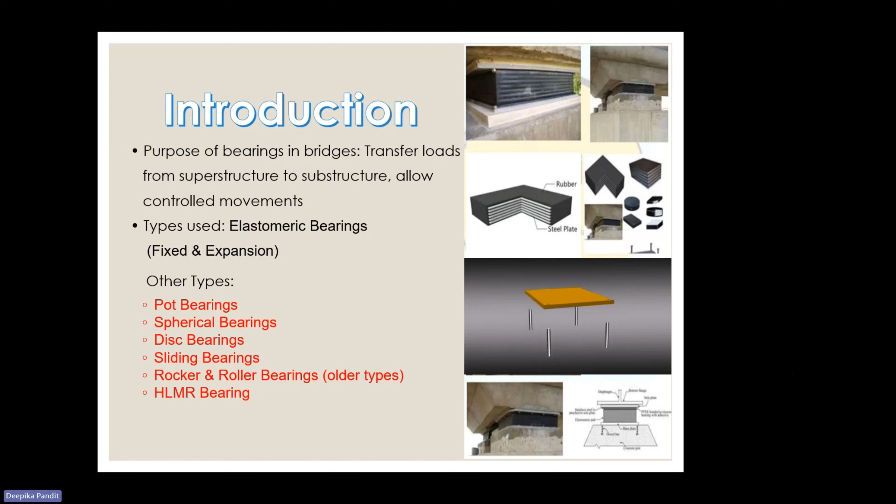So let's focus on the elastomeric bearing and watch what's happening here. This is showing a video of a bearing.

It will go inside—that is the pedestal, the one you can see on the bottom. There's a concrete pedestal on the bottom, and a masonry plate on top. This is not an elastomeric bearing, it's actually a pot bearing, but it's shown just to give you a general understanding of bearings.

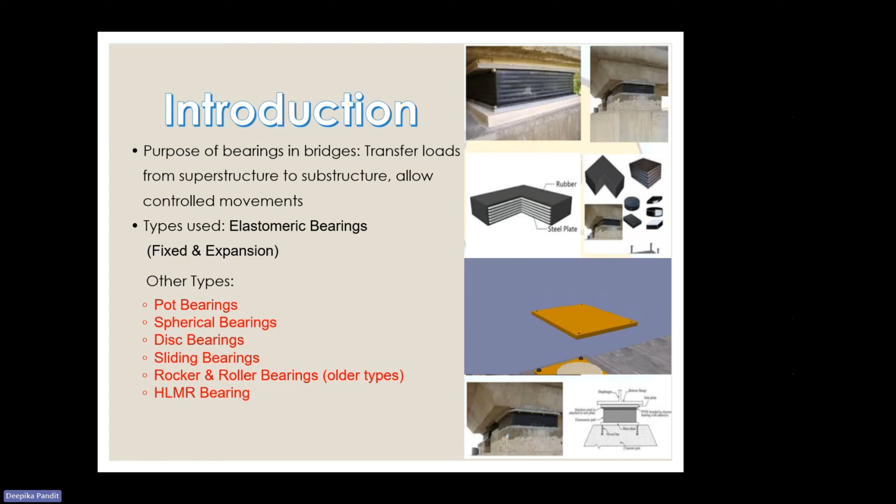Moving to the next slide: elastomeric bearing and HLMR bearing. HLMR bearing is included here because you will hear this type a lot while working. The image on the left shows rubber with internal steel reinforcement, commonly used in bridge and structural applications. These are cost effective, maintenance free, and allow for vertical load compression as well as horizontal rotation and shear—these are the reasons we use it.

But sometimes we use HLMR bearings such as pot style or disc style bearings. These are designed for high load conditions, because they are used for heavy and complex structures. We are not using this type.

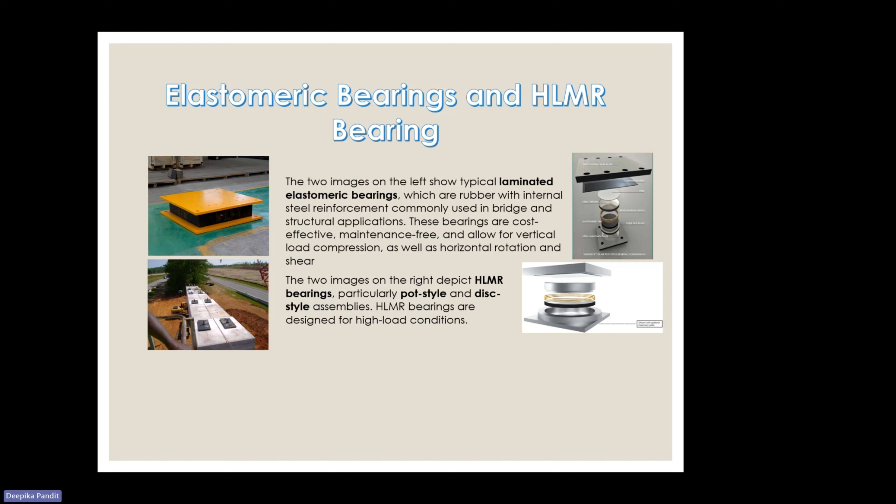So, fixed and expansion bearing—you'll hear this term a lot. Here you can see an example of what is meant by expansion versus fixed bearing. You can see from the picture the difference: the fixed bearing has a pin, an anchor pin, on the bottom that fixes it in place at one end. We calculate the diameter for that bearing as well.

On the top, you can see the expansion bearing—it does not have that pin. That is the clear difference between the fixed and expansion bearing.

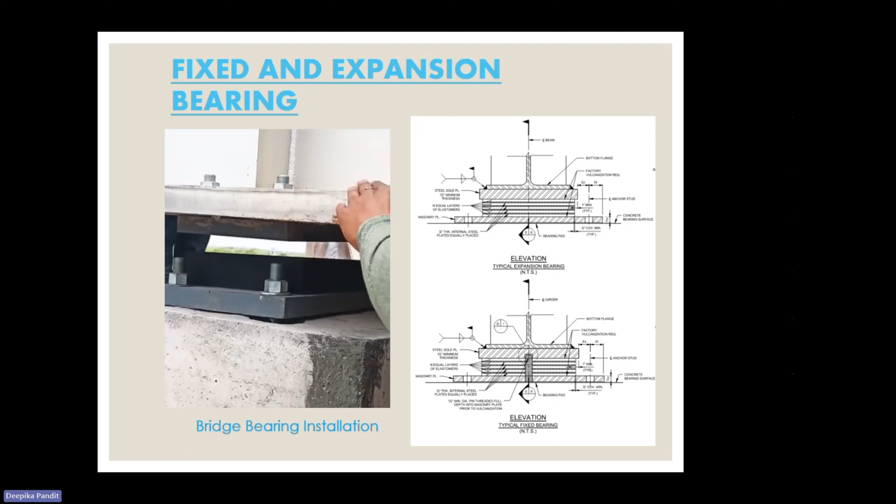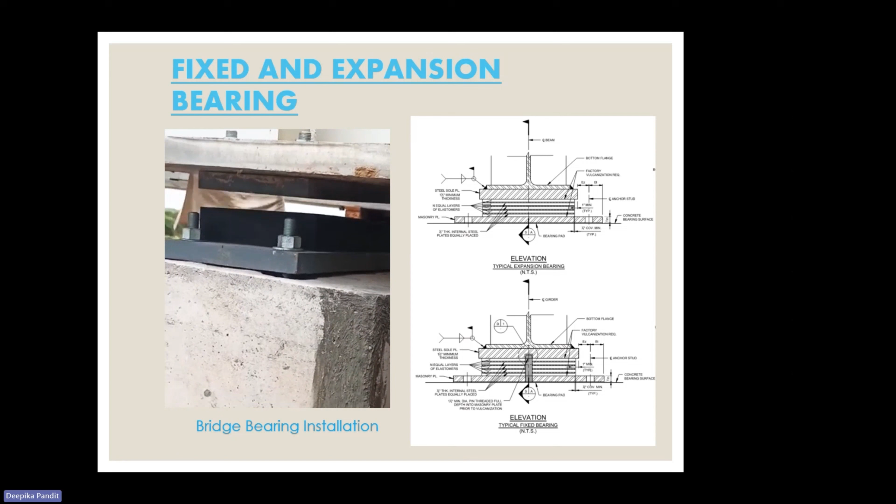Here you can see the bridge installation process. You can see the pedestal, the masonry plate on top, the anchor pin, and workers carefully installing the bearings. You can see the elastomeric bearing they are using—usually neoprene or natural rubber for that expansion bearing.

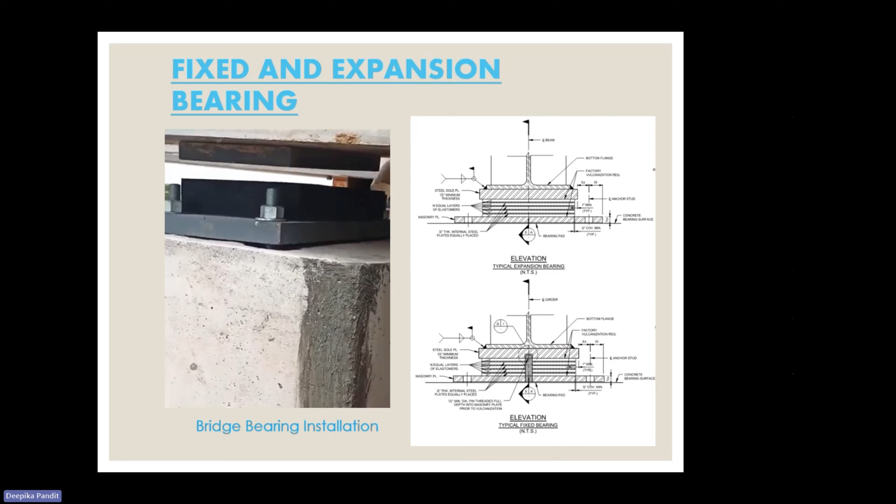So there are a few design assumptions that we use. The bearing is for straight steel or concrete multi-beam bridges—like the three bridges we use, which are straight, not curved. That's the first assumption. Usually bridges that are curved or skewed require more complex analysis, involving torsion and rotation in multiple directions, but here they simplify the design to a straight multi-beam bridge.

Another assumption is we use the elastomer hardness as 50 durometer Shore A. We took all these values from reference standards you can see at the bottom: the NYSDOT bridge manual and bridge design specification. So we use the Shore A durometer.

So what does that mean—what is Shore A durometer? It is the hardness of the elastomer. The value of 50 Shore A means that the elastomer is of medium hardness, since there are different values for the hardness of durometer.

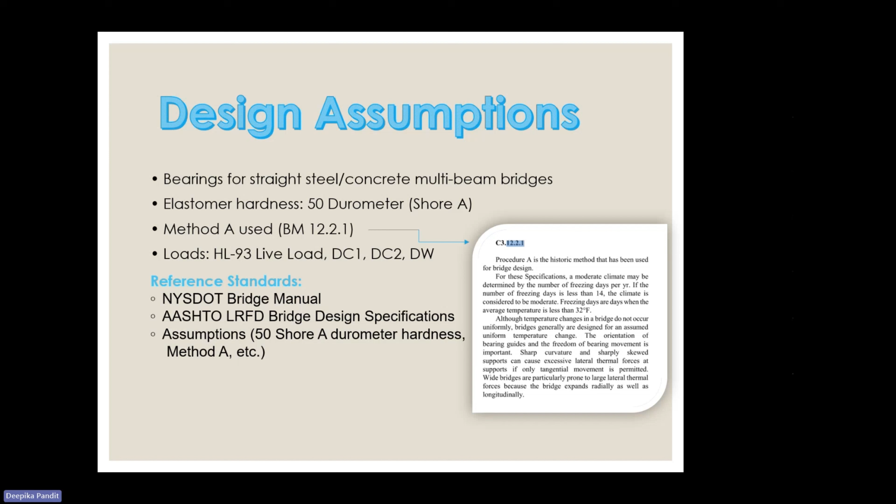You can read for yourself. I don't want to take a lot of your time, so I will just try to keep it short and simple. Let's go to another slide.

Starting, we need to put some inputs for the bearing design. So for the inputs, we are using live load, dead load, DW meaning the future wearing surface utilities, and seismic load at fixed bearing. So for all three bridges, I only used the live load, which governs the traffic loading on bearings, and the DC1, which is non-composite.

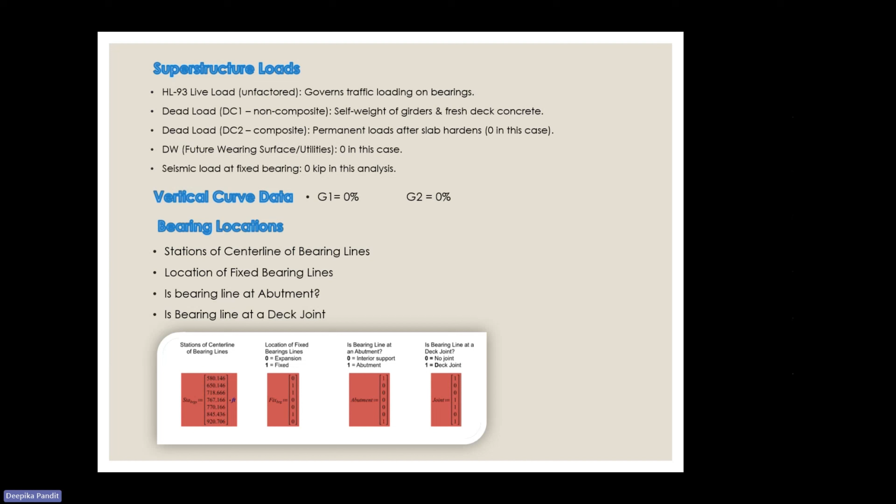And then, is bearing line at an abutment? What is meant by that? You can see from the picture - if it's on the abutment, it's usually on the end. So you can see one on the end. So is bearing line at the deck joint - 0. This is all from the picture, from the structural profile. No joint is 0. Deck joint, if there is a joint, write 1. If there is no joint, just write 0.

So let's go to the other. We have to give the material properties for everything - girder, elastomer, steel laminates, sole masonry plate, thermal expansion. Everything we have to put, and they are all coming from the code itself, LRFD. Where is it coming from? 14.7 - usually 14.7 is the specs, guys.

Elastomer - so I don't want to take more of your time on this material thing. These are the tensile strengths. The first, girder Fu, means the girder ultimate tensile strength. We took it as 70 ksi. This is the general material property that we took for all three bridges.

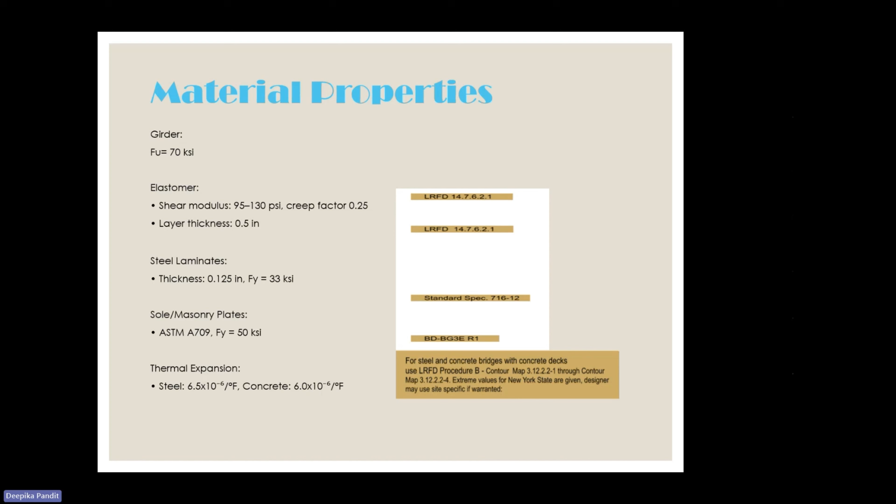Then bearing analysis. So we take the elastomer dimension, length, width, and number of layers. This is the thing that we are designing. We initially just pick a number, like let's say we will just assume, okay, let's start with 14 and 12, and then let's see if it will pass the design check or not. And then we will see for ourselves, like let's take 12 and 10.

But what does the upper thing say on the top right? Specify the dimension for the elastomer to be analyzed. Note that the length should be less than or equal to width. So our length cannot be 12 and width cannot be 10, because length is higher than the width. So we have to have length that is less than the width. So we can test length as 10 and width to be 12.

And only then can we get the K ratio that we would need to check later while doing the bearing analysis. Only then the K ratio will be 1. So 1 is pass, 0 is fail. So I think the formula is like L by W. So that is how we do it.

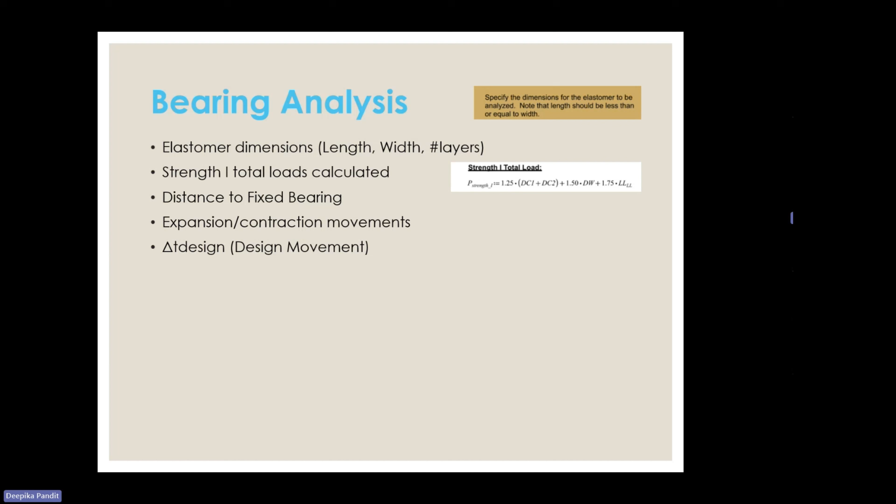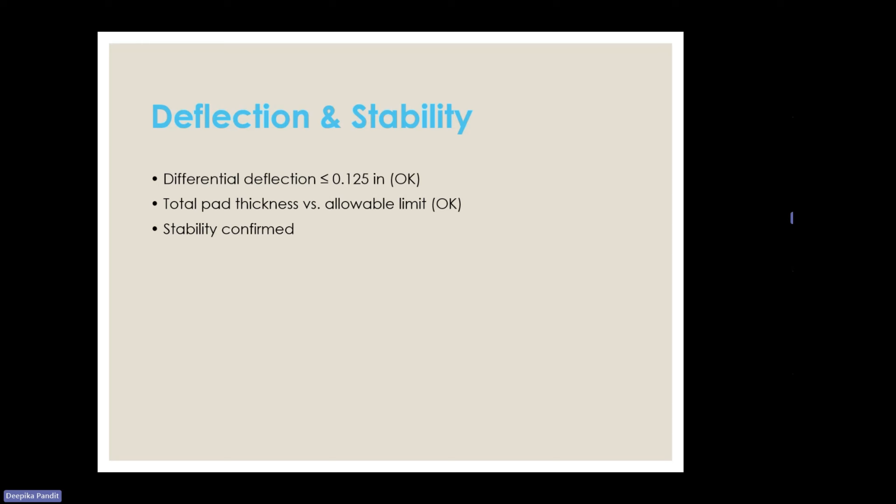Deflection and stability, these are all the deflection checks we do. Differential deflection should be less than or equal to 0.125. Total pad thickness versus allowable limit. Stability confirmed. So yeah, we do the check, and if it's under the limits, then it's confirmed, it's satisfied. So this is the main thing. We do so many checks here.

Shear deformation check that I told you before, finding the design movement, and then the deformation check one. Second is aspect ratio check. There are so many formulas that we have, and we need to put the inputs inside all those formulas. Okay, and then shape factor limit check. Check number 4 is maximum compressive stress, and then the minimum compressive stress.

So maximum and minimum compressive stress, that is the tricky part. While putting the dimension for the elastomers, if you put the correct dimension, then the design will pass. Otherwise it's very hard to satisfy those stresses. It's very hard. So checks 3, 4, 5 are very important checks for us to satisfy the design.

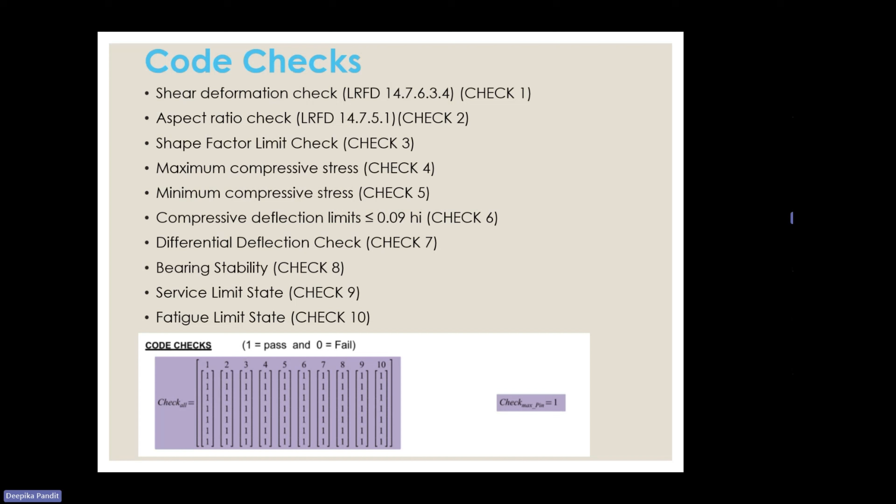So okay, sole plate design. You can see the sole plate in the beginning of the video. There was a sole plate on the top side, and a masonry plate on the bottom. So we are calculating for the sole plate as well, length and width from the girder flange width and elastomer size. This is all we need to calculate. It will calculate from the length and width of the elastomer that we provided in the beginning. So I think the formula is we just add 1, and then it will calculate.

Minimum thickness is 1.5 inch. Bevel is required if grade is greater than 1%, or Δt is greater than 0.125 inch. So in all the checks, we don't require the bevel. So that was the result. I have not kept the result for all 3 bridges, just to make it short and simple.

So let's go to the other slide. Oh, 1 minute. Let's go to the other slide.

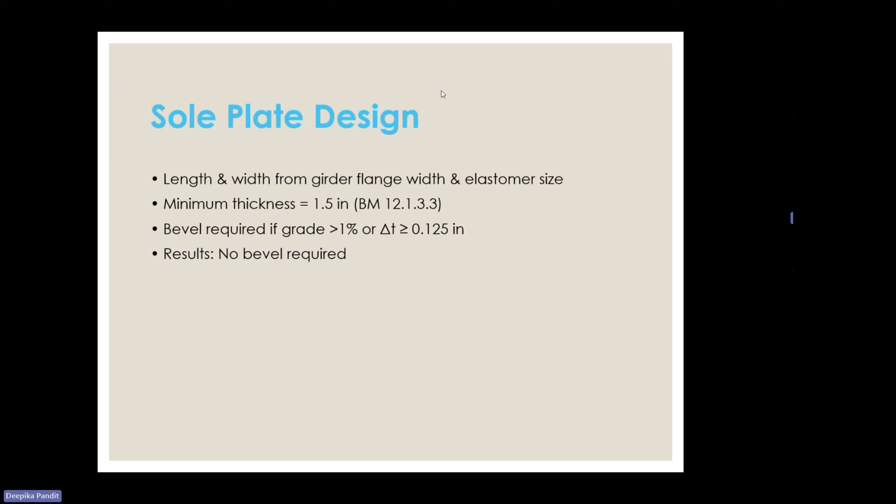Bearing anchorage and restraint: loads considered are from temperature, braking force, wind loads. These are the things that we calculated. We also have the wind load on vehicles. We took the wind load at 0.1 kip per foot, and we calculated the factored horizontal force for this.

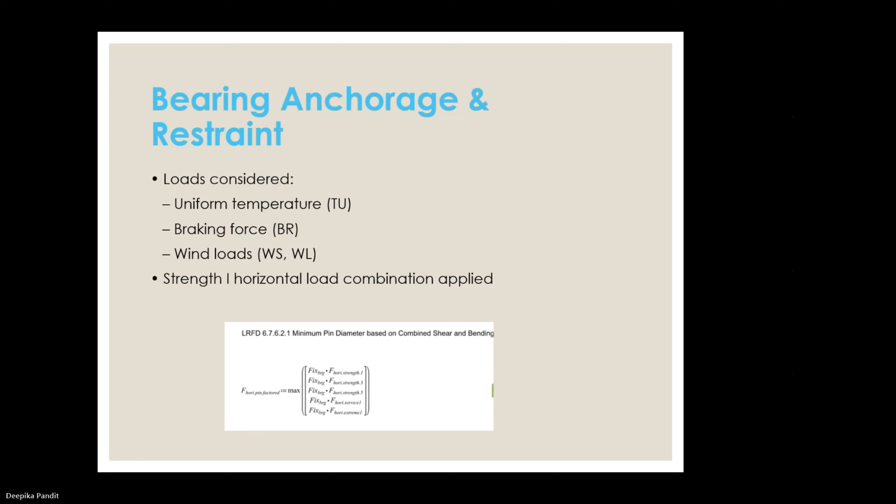For this, we calculated the horizontal force with different combinations. These are all the combinations: Strength I, Strength III, Strength V, and then Service I and Extreme Event, and then we took the maximum of all. These are all required while calculating the moment and ultimate shear at the base of the pin. We require this because there is a check for the moment and shear as well.

Fixed bearing anchor pin design. This is the anchor pin that I showed you at the beginning of the slide. We had the anchor pin for the fixed bearing, and that's the top part of it, which is zoomed in. That's the detail. You can see the sole plate here and the anchor pin, center of the anchor pin, and then we have to calculate the phi p as well, which is the dimension of the pin. Design the anchor pin to resist the moment and shear at the base of the pin. And that's the objective of this design.

Ensure pin diameter is adequate under combined flexure and shear conditions. And then the check that we do for this is that the phi pin should be less than 3 inches. The difficulty that I faced while doing the bearing design is that my phi p was usually more than 3, and that's why I had to check everything, make sure the formulas are correct, make sure the template that we had is correctly done. So yeah, some of the things I had to fix, and we were able to achieve 1.5, which is less than 3 inches.

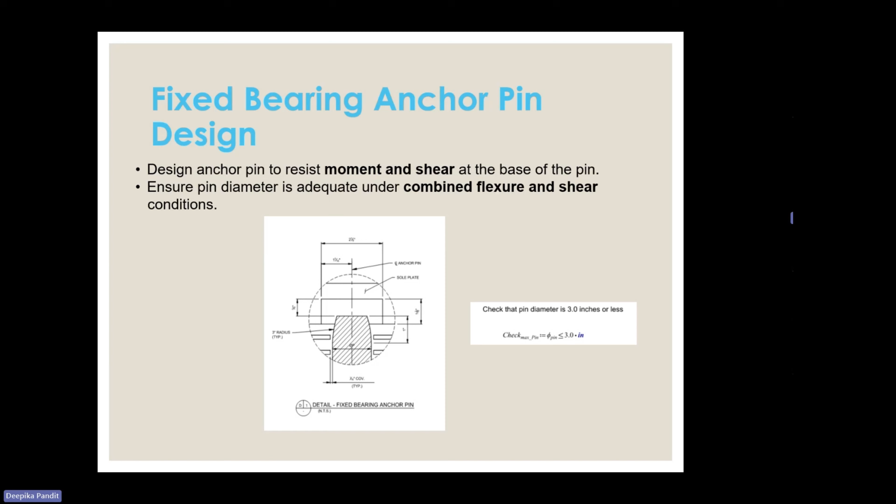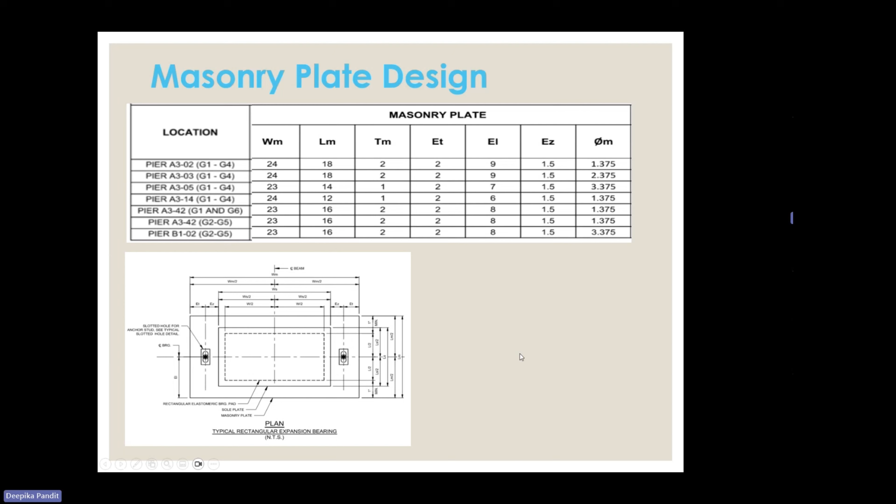So let's go to the other slide, which is the masonry plate design. We designed the sole plate, so of course we have to design the masonry plate as well. This is just a table that I took from my design, for different locations of piers. You can see WM, the width; you can see in the picture as well. This is the width and the length. We calculated the thickness. We calculated the ET, which is the minimum edge distance, minimum longitudinal edge distance, and then EZ and EL, the transverse and rotational distance, and then Øm. We calculated that as well. Let's go to the other.

We use four quantities. These are the inputs, the dead load and live load. These are the other things that we calculated. These are the inputs, and these are the calculations that we did. And then yes, we found the phi pin less than 3. So this is yet to be updated.

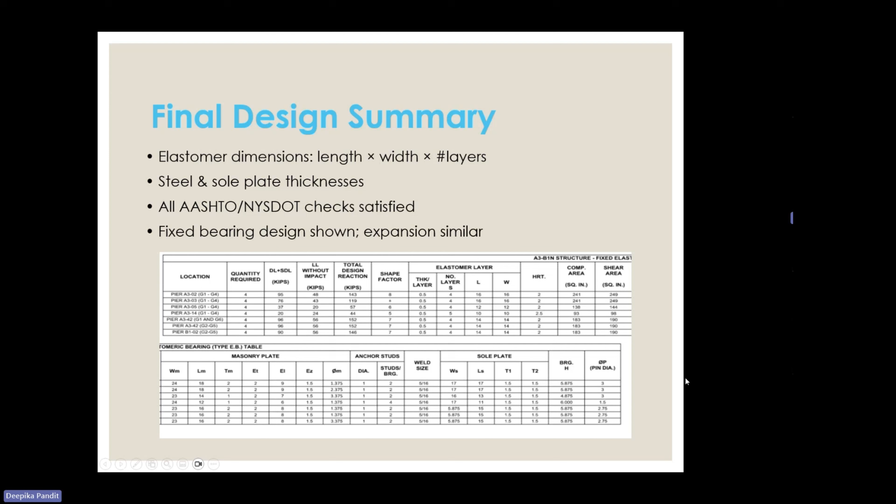Conclusion: the designed steel laminated elastomeric bearings, fixed and expansion, with sole plate satisfy all the LRFD design checks: stress, deflection, fatigue, stability, and serviceability. Bearing dimensions are within the standard limits, and sole plate design meets strength and thickness requirements. There is no issue with thermal or wind-induced movement. The design is acceptable for use in a straight steel multi-girder bridge with urban wind conditions.

So to conclude, the steel laminated elastomeric bearings with sole plates designed for this project successfully meet all the LRFD and NYSDOT requirements. There were no issues with thermal, wind, or load-induced movements. The chosen dimensions and material properties fall under the standard limits. The bearings satisfy the strength and stability checks. So we are all good on that.

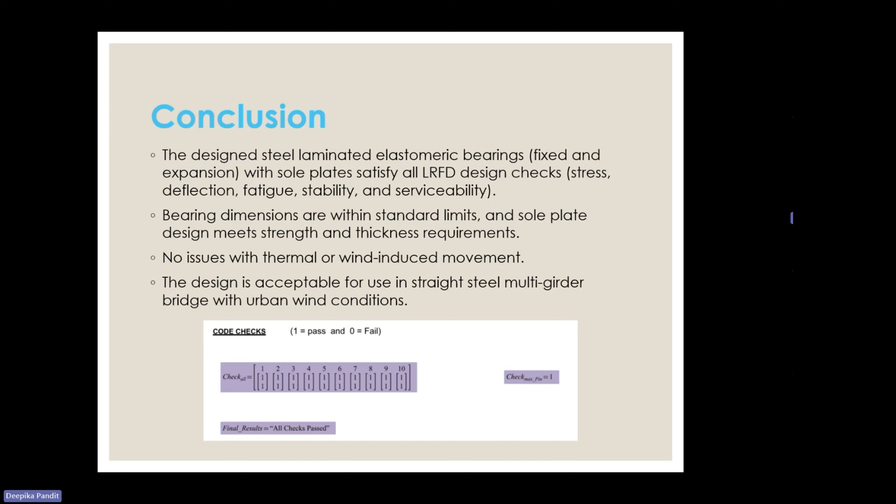So in this presentation, we walked through the different types of bearings used in bridges, the design assumptions and the standards followed, the load considerations, and material properties. We also went through the detailed bearing design process, including the analysis, code checks, and anchorage. So yeah, this is the conclusion.